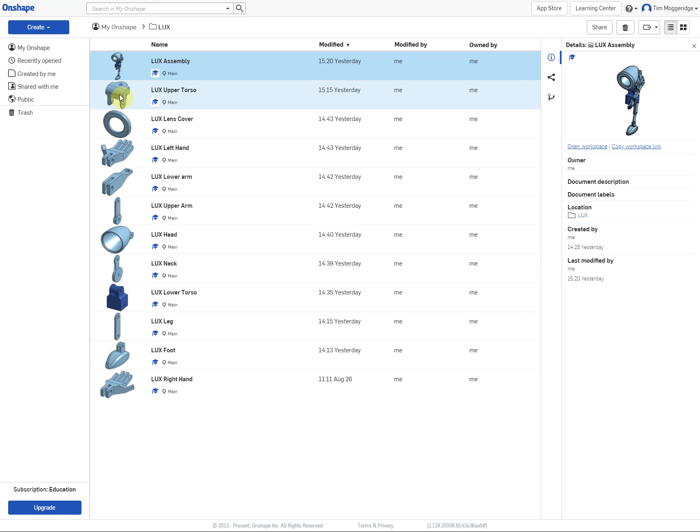So we're going to open up the part we're going to draw. Let's go with the lower torso. So just double clicked on that to open up, and here it is in the design window. So if I come down here, click on the plus sign, I can pick the option to create a drawing. It comes up with some existing templates, but they don't always necessarily tie in to what we want to do. So we're going to go with a custom template.

We're going to make sure we've got ISO, or International Standards Organization, selected. We're going to be working in English because we need to do that for our IB. And for this part, we're going to change the size to A3. When it comes to you working on your IA, you might want to be working in A4 all the time, A4 portrait, because that's the format of your project work, your coursework that you have to hand in. We're going to go for millimeters, and the decimal separator is going to be a period. Some countries use a comma.

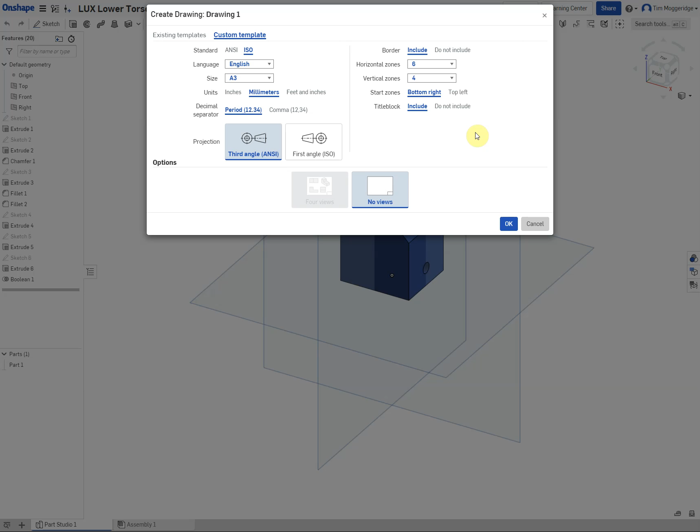What we are going to do is we're going to change the projection to third angle. This is now the preferred option through most of the world. And we're not going to worry about views, and we're not going to worry about this over here. You could turn off the border if you wanted to, if this is going into your portfolio and you needed a little more drawing space. So click on OK, and it will load up a drawing tab.

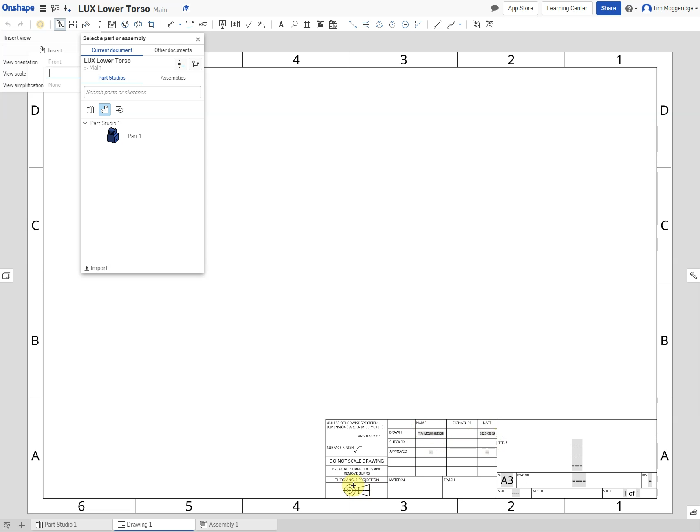So if we look down the bottom, we can see that we've got a part studio with a part in, we've got an assembly, you can have assemblies associated with part studios, and we've got our drawing, which is here. So you can see some of the information's been filled in. So it's got my name on here, so it knows I've drawn it. It's got today's date, and it's got the correct symbol for the third angle projection. And we can add in titles and things later if we want.

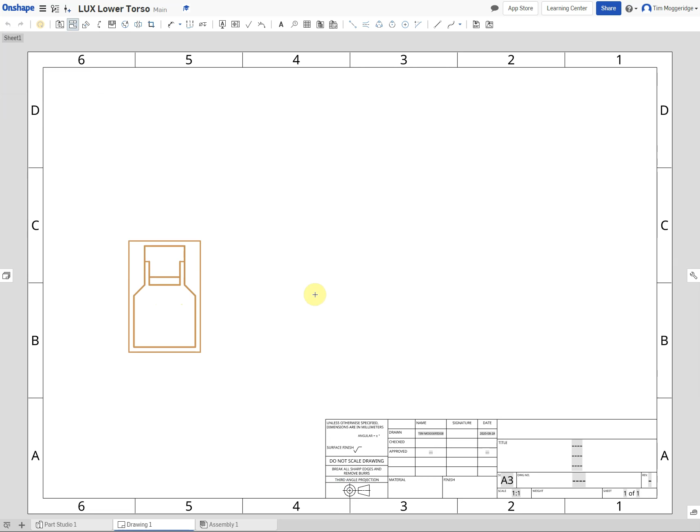So to add a part, I'm going to click on the part that I want, and automatically it will bring over different views, which after a short delay it will put a preview of what it's going to look like in there. So I can left click to place that. And because in an orthographic drawing the views should line up, once I've placed the first view, I can move over to the right, click, and it will put another view.

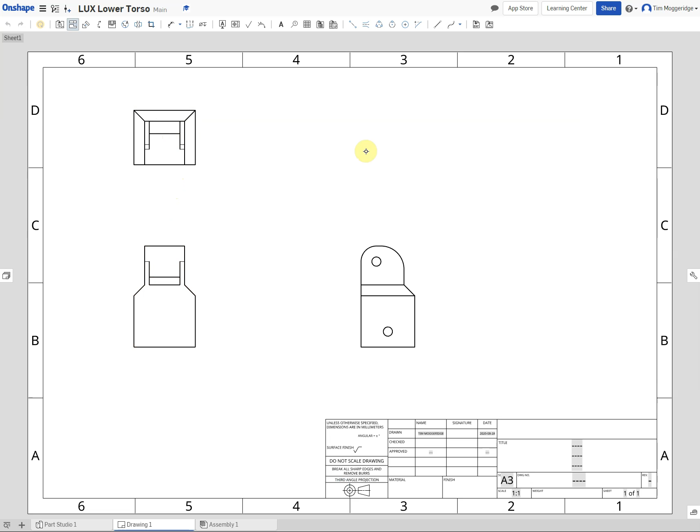And if I want to add additional views, like a top view, then I can click on this view and then move to the correct position, and it will put in the correct view for that. So at the moment, we didn't change the scale, so we're working at a scale of 1 to 1. So this part we could have probably gotten away with drawing it on a piece of A4 paper and printing it off on A4.

It would depend on what our purpose is for that. So for example, with this particular component on a larger drawing, we could fit lots of dimensions on there. If we were just going to create this so that we could cut these shapes out, printing it out at a 1-to-1 scale, to use as a template to perhaps stick on a foam block so that we can cut the foam block to size, then we could get away with putting that on an A4 and putting the views as close to each other as possible. So let's start off by adding some dimensions.

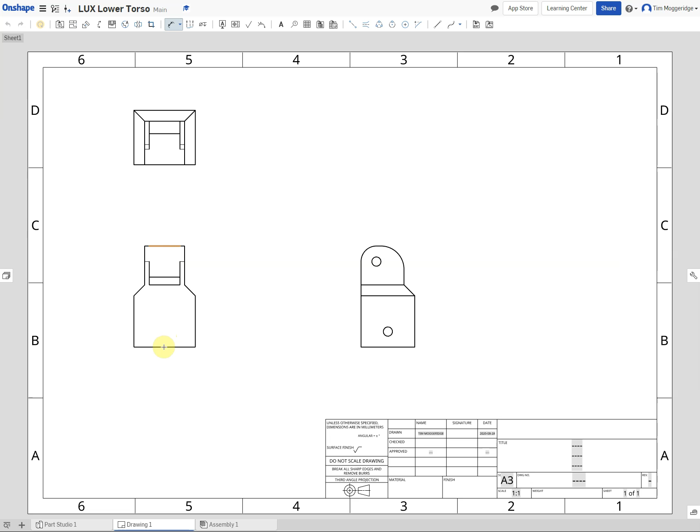So we can use the dimension tool, and normally with drawings, if you can, one of the things that you want to try and incorporate are the overall dimensions. So let's give it an overall height. And then we can give it an overall width for the front, and from the side view we can give it an overall width of the side as well.

Other things that might be important are positions of holes and sizes of holes. It's quite important to try and make sure that the lines don't overlap each other and that they come away from the part. So the lines that drop down from the edge of the part that are thinner than the lines of the part are called lead lines, and the arrowed lines are dimension lines.

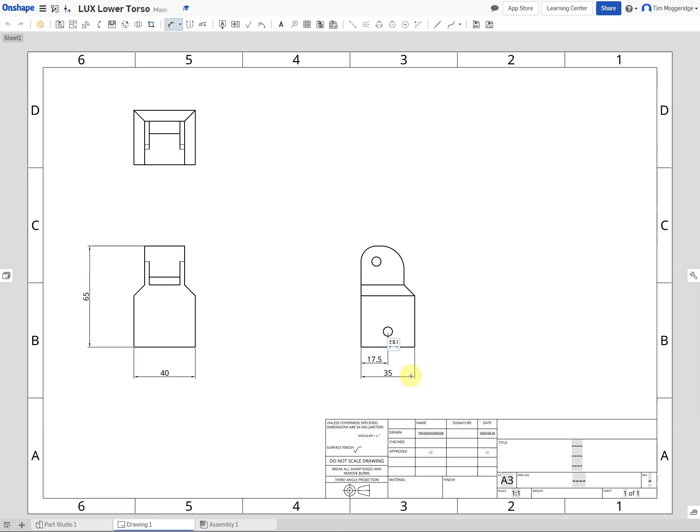And you'll see that with the ISO, International Standards Organization, setting, the dimension goes above the center of the dimension line. It's not a break in the dimension line with it written in the middle. So we might also want to dimension the diameter of that hole, and we would want to put in the vertical height as well. Now sometimes that can look a little bit clumsy if we're trying to fit a number in a small gap, so we can always pull down.

And if we're dimensioning something, we often use a datum edge that we might put all of our dimensions in from. So for example, if we're dimensioning the different heights here, we would do it in this way, and then the center of our circle in. Now we don't need to dimension the overall height because we've got that dimension over here, but what we probably ought to do is dimension that radius, and we ought to dimension that radius.

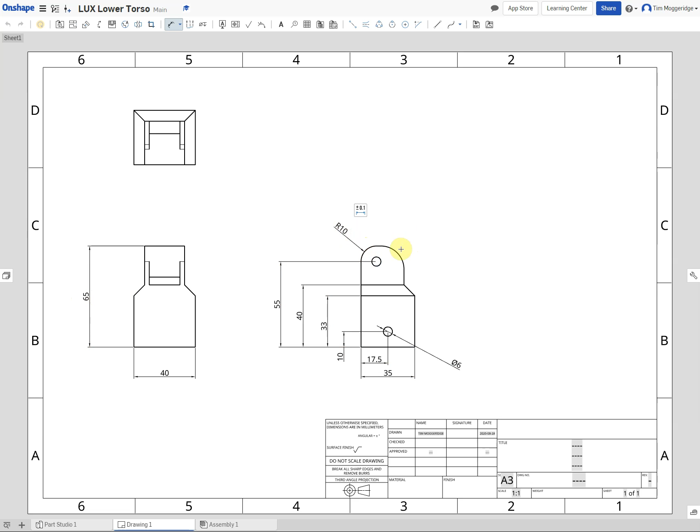Now this is where sometimes we have to break the rules. If we were going to dimension this width as we go up, you can see that it crosses over these leader lines. We could possibly move those so that they were inside there, and that didn't happen. Now, we don't need to dimension the length of that line. We don't need to dimension the angle of that line. The reason being is that we could work that out. We know the overall distance here. We know the distance here. So we effectively know the length of that line, and we know the distance between the two. So we could work that out with a little bit of trigonometry. Or we could just manufacture it. But we could have that angle in if we wanted to.

So that's it. That's a very basic introduction to how to create engineering drawings on Onshape. There are lots of other features, but we will explore those at a later date as we increase our knowledge with the software and as the demands of what we're doing dictate it. Otherwise, we could end up giving you too much information and you getting a bit overwhelmed by it. So how to create the different views, how to add on dimensions, that's all you need for the moment.